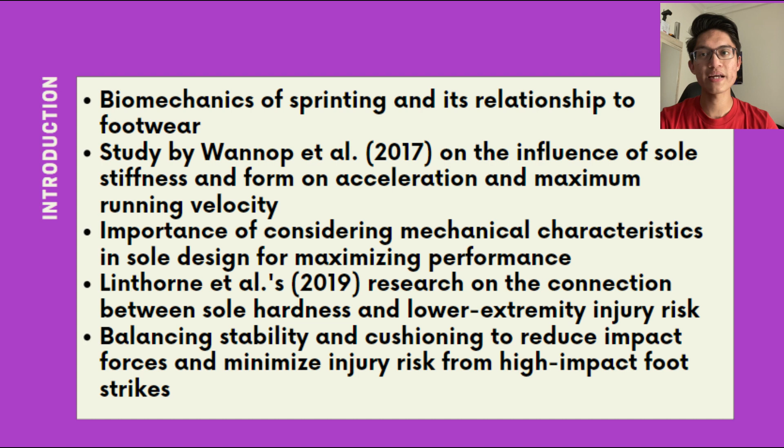Creating the optimal spike shoe sole is an ongoing process of innovation and improvement. By combining scientific knowledge with industrial expertise, we can develop spike shoes that maximize speed, traction, and stability while minimizing the risk of injuries. So let's delve into the world of spike shoe sole design and discover how it can revolutionize track and field athletes.

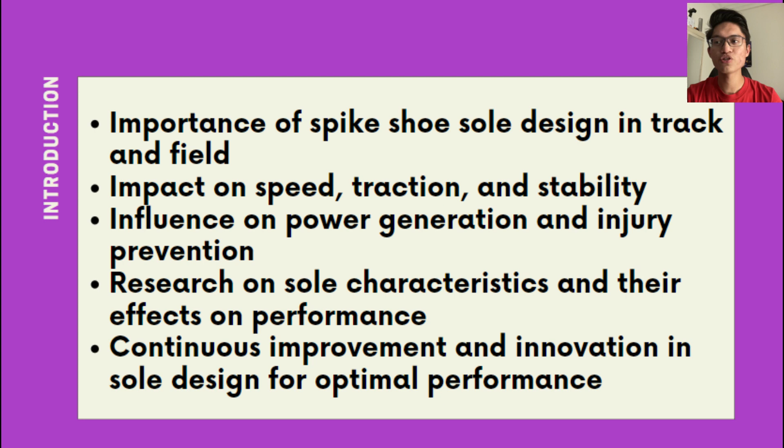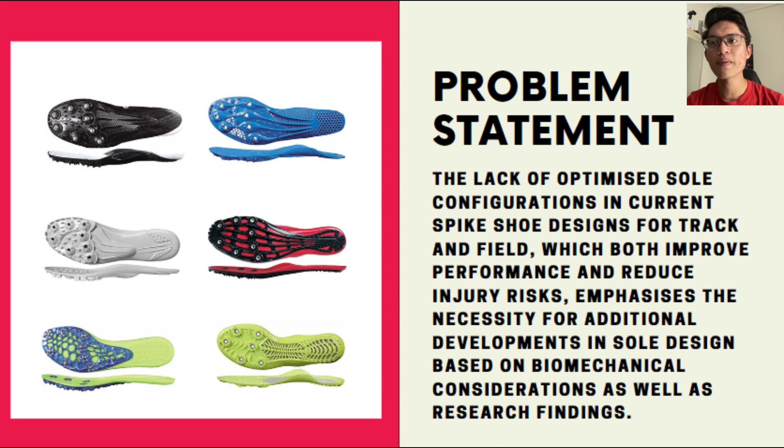Our problem statement is: the current spike shoe design in track and field lacks an optimized sole configuration that simultaneously enhances performance and minimizes injury risk, highlighting the need for further investment in sole design based on biomechanical factors and research insights.

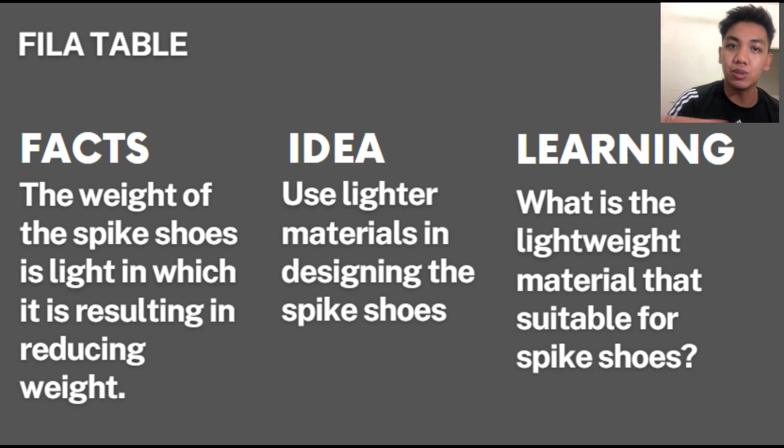Today I will explain the FILA table. The fact is the weight of the spike shoe is light, resulting in reduced weight. The idea is to use lighter material in designing the spike shoe. For learning: what is the lightweight material that is suitable for spike shoes? The action is to reduce the overall weight of spike shoes. We will research these two materials, polyurethane and carbon fiber, to compare which material is most suitable for our application, enabling athletes to move with greater efficiency and speed.

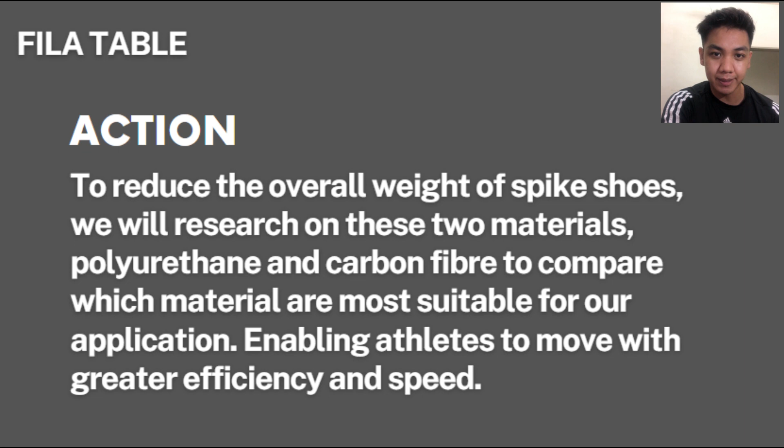We have created a track sole specifically for the 400 meters sprinting event. It is designed to give athletes the edge on the track. Here are some of the key features of our track sole. The first one is the measurement. The sole measures 741.66mm in length overall, with specific dimensions at different points. For the toe section, it will be 245.51mm. For the center, 176.56mm. For the heel, 162.09mm. And at its thickest point, it measures 37.17mm.

The thickness of the sole falls within the range of 8 to 11mm, meeting the requirements for track events according to the World Athletics Guidelines 2022. The material for our track sole is epoxy carbon UD 230 GPa prepreg, a type of carbon fiber known for its strength and lightness. For energy storage, the sole stores a significant amount of energy when it flexes upon initial ground contact, helping athletes generate power with each step.

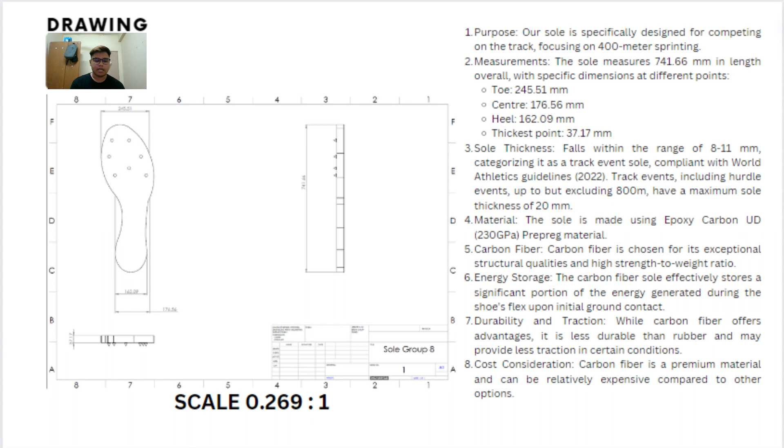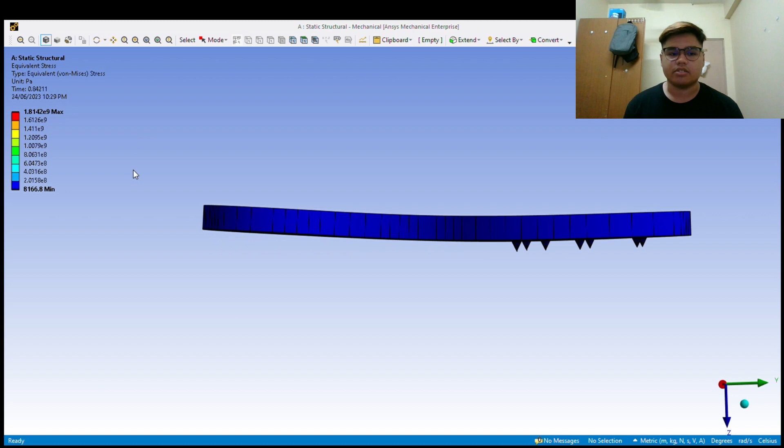This is a simulation of our track sole, simulated with the specification mentioned in the previous slide. In our simulation, there's only blue color shown on the sole, which indicates that the track sole experiences minimal stress.

For the material analysis, we have two materials to analyze. Firstly, epoxy carbon UD. It has an excellent strength to weight ratio. It is lightweight and has a high level of strength. Running spikes benefit from this since it allows for improved performance without adding needless weight. Epoxy carbon UD also has higher durability. Carbon fiber composites are renowned for their durability, especially epoxy carbon UD prepreg. They are well suited for the difficult conditions of running since they have high resilience to fatigue and can survive repeated stress and loading cycles.

The second material we analyzed is polyurethane. Polyurethane can be manufactured with low density, resulting in lightweight components without compromising strength and durability. This makes it advantageous for applications where weight reduction is important, such as automotive parts, aircraft components, and sports equipment. Besides that, polyurethane is known for its exceptional durability and long lifespan. It is resistant to wear, tear, impact, and abrasion, making it suitable for applications that require high performance and longevity.

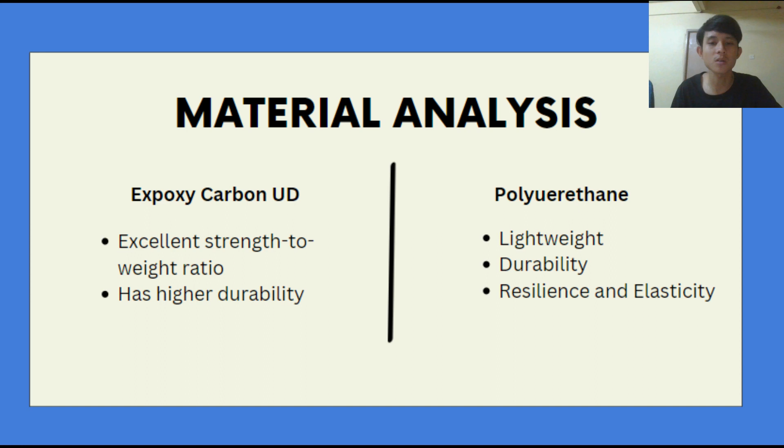So for the analytical calculation result, we calculated the deflection at the end of the sole for the carbon fiber and the polyurethane. For carbon fiber, it has a deflection of negative 0.029 micrometer, and the polyurethane has a deflection of negative 0.89 millimeter.

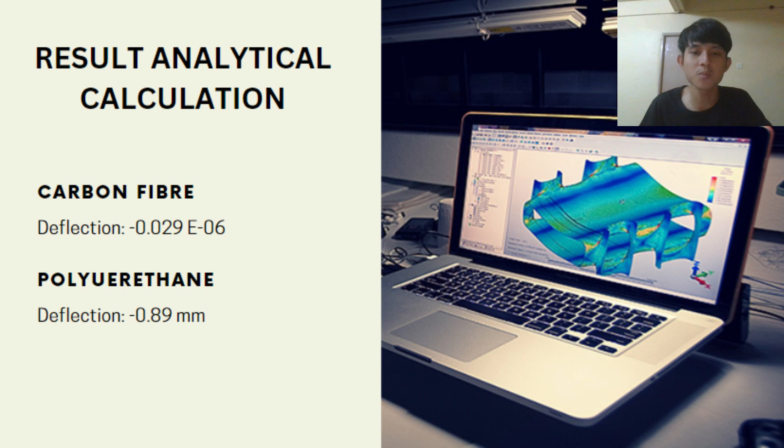For my part, which is cost analysis, several factors need to be considered, such as material cost, manufacturing cost, labor cost, overhead and miscellaneous cost, and also the profit margin. For the material cost, for the sole, the cost will be based on the quality, quantity, and supplier. Meanwhile, for the spikes, which is titanium alloy, the cost will be based on grade, quantity, and market condition, so that we get to know the pricing details.

Next is manufacturing cost. For the sole manufacturing, the manufacturing process for the sole involves layup, curing, and finishing. So the cost will depend on the complexity of the design, required mold, labor cost, and machinery expenses. Same goes to the spike manufacturing. The cost will depend on the spike design complexity, labor cost, and machinery expenses. But add on, since it is spiked, the cost also depends on material wastage.

And the labor cost. Labor cost can vary significantly based on the manufacturing location. If we produce our spike shoes at Semenanjung. The different regions have their own wage rates, so it may be a higher shipping fee to come to Sarawak. So to ease our Sarawak athletes and give an affordable price, we chose Sarawak for the manufacturing location.

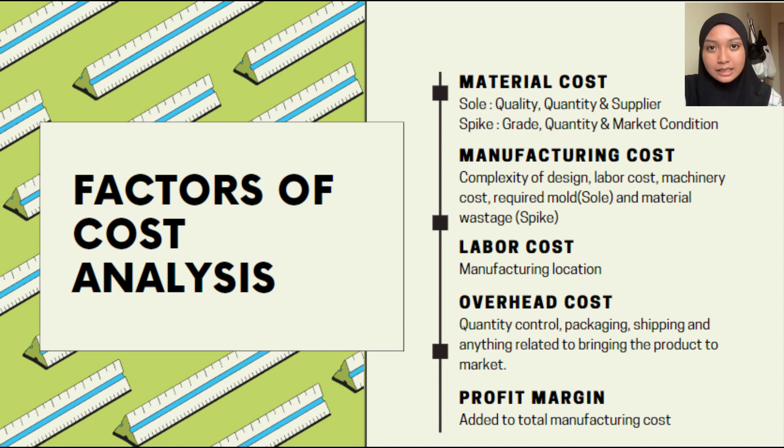For the overhead and miscellaneous costs, it includes costs associated with development, quality control, packaging, marketing, shipping, and other expenses related to bringing the product to market. Lastly is a profit margin, which is typically added to the total manufacturing. I want to compare our shoes with one brand, which is Nike. The cost differences and the factors may influence the pricing.

First, the brand and reputation of the shoes. We know that Nike is a globally recognized brand known for its premium quality and innovative athletic footwear, which often results in higher price points compared to other brands. While our shoes, which are new in this industry, tend to have a slightly more affordable pricing structure, where customers will choose the affordable pricing with the high quality also.

And next is the technology and features. Nike, for example, the Nike Air Zoom Maxfly More Uptempo shoe is equipped with Nike proprietary technologies such as Air Zoom cushioning, which provides responsive and comfortable support. These advanced technologies and features can contribute to a higher price tag. On the other hand, our shoe is a more streamlined track shoe designed for speed, focusing on lightweight performance rather than extensive cushioning technologies, which may lead to a comparatively lower cost.

The material used in construction of the shoes also influences the cost. For our shoes, the material we chose for the sole is epoxy carbon UD with 230 gigapascal, and for the spikes we chose titanium alloy, which may be more expensive compared to other commonly used materials in spike shoes. But Nike often incorporates premium materials and advanced manufacturing techniques, which can also contribute to higher production costs and consequently a higher retail price. So I think for the material and construction it is a balanced cost for our shoes and the Nike one.